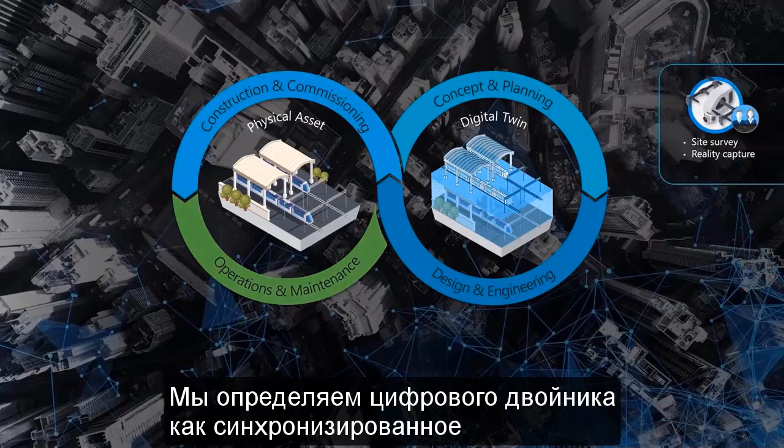Let's start today's journey by understanding what we mean by a digital twin. We define a digital twin as a synchronized virtual representation of a real-world asset, a digital version of reality that is continuously updated. Now, you might be asking yourself, why is this important to me, and what does that really mean? What could I do now that I couldn't do before?

For starters, I want you to think about the Uber app on your phone. It's easy to use, it provides real-time updates, and it gets you where you need to go. It's hassle-free, and the interface is easy to learn. The need to get from A to B never actually changed. What changed was the entire transactional experience.

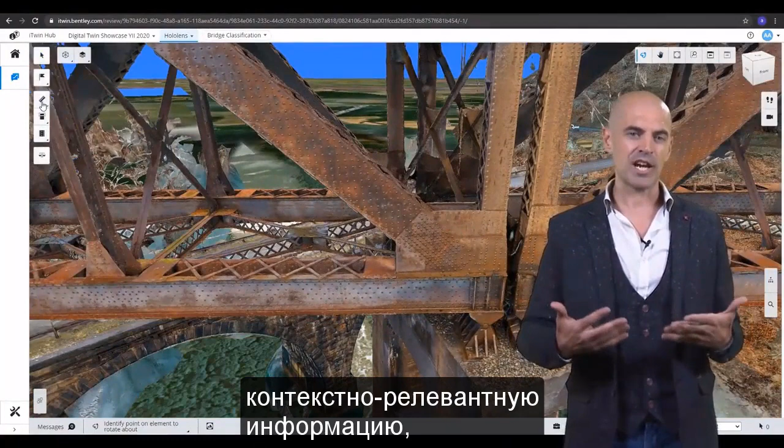And when it comes to digital twins, we're taking a similar approach. We believe that interacting with digital versions of real infrastructure should be easy, it should be intuitive, and it should deliver contextually relevant information when and where our users need it. Now, how our users transact with their asset information, that is what's shifting.

We are seeing owners, designers, contractors, and users throughout the supply chain embracing this new way of working. And what we're talking about here is a true digital evolution in how the physical environment and its real-world infrastructure, including all the equipment, materials, labor, sensor data, and related information is managed throughout its life cycle.

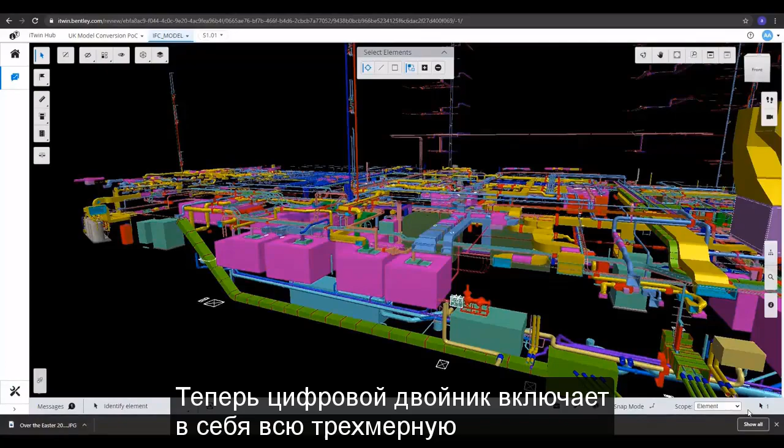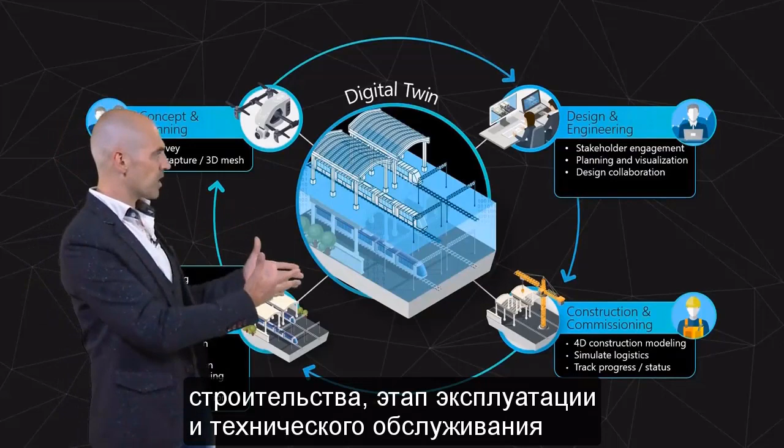Now, a digital twin includes all the 3D geometry, the design information, the issues, the photos, the point clouds, basically the full history of the asset as it changes over time. And this includes the prototyping phase, the construction phase, the operations and maintenance phase, and any subsequent redesign.

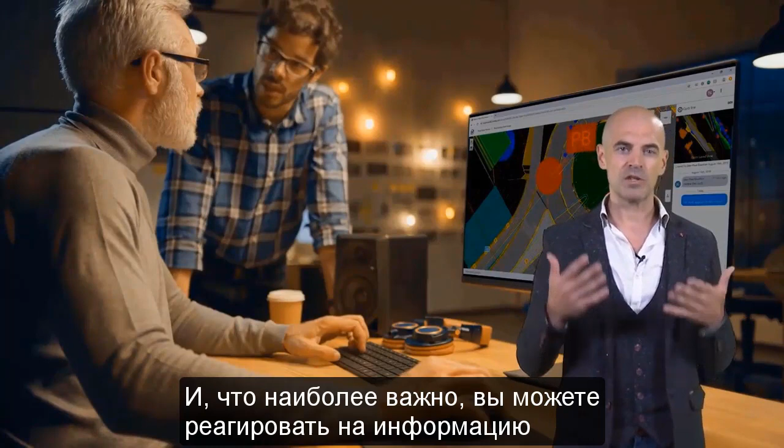So what does this mean for you? It means that you can now access, update, and most importantly, you can respond to information about your asset using an intuitive user interface designed for web, mobile, and now mixed reality.

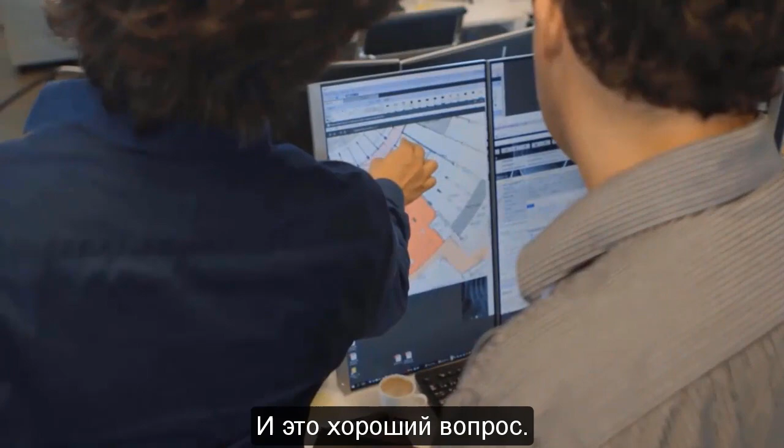You might also be wondering, how is a digital twin different from BIM, Building Information Modeling? And that's a good question. The way we see it, the digital twin is a non-disruptive evolution of BIM-centric workflows. It's a shift from static models to dynamic models, from files to change ledgers, from desktop apps to web apps, and from 2D touchscreens to 3D holographic displays.

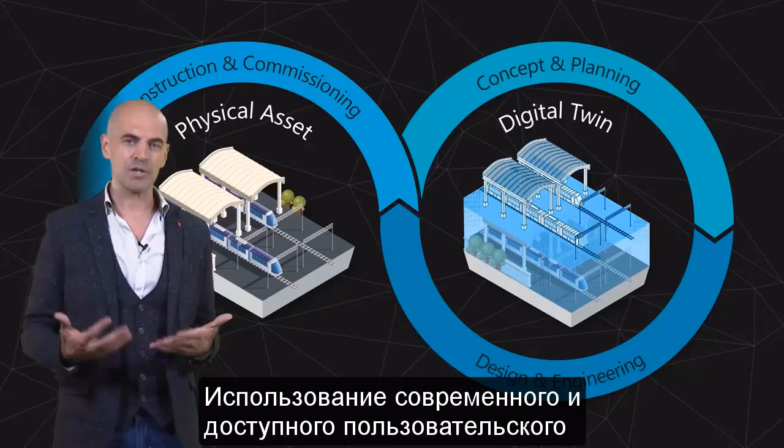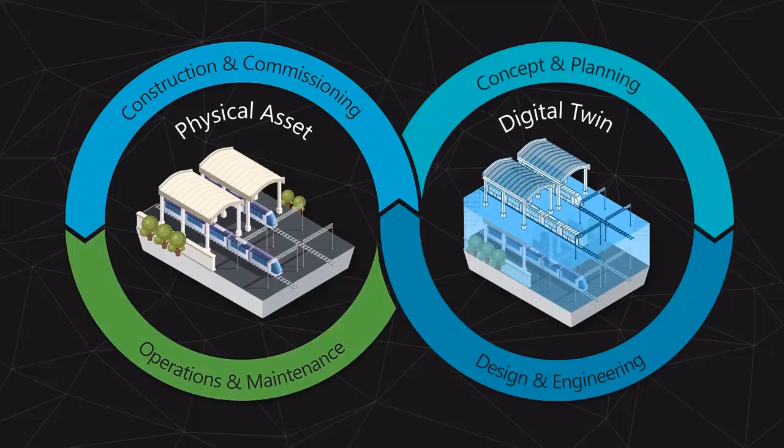Digital twins advance the existing model-based processes by optimizing the feedback loops between team members, using modern and accessible user experiences backed up by cloud services. And with the digital twin, we are seeing the virtual and the physical converging, creating these tighter and tighter feedback loops. And that is what leading organizations are getting out of their digital twins today. Tighter feedback loops leading to better decision-making, leading to improvements in worker productivity, human safety, and asset reliability.

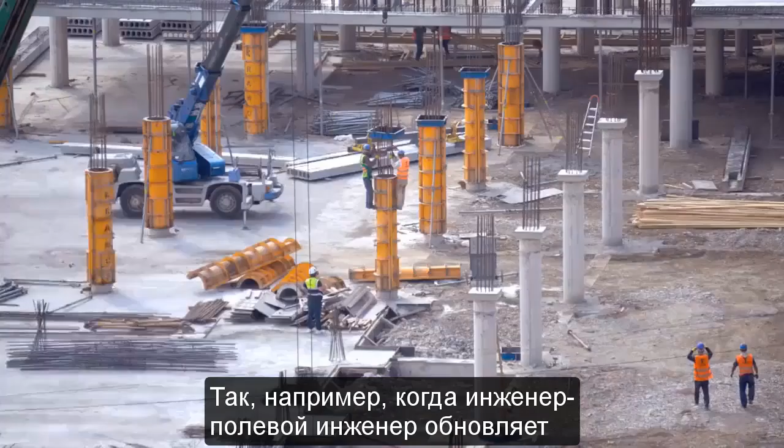So for example, when a field engineer updates the status of a concrete column to being erected in the field, that information is reflected in the construction digital twin, and the production schedule gets updated. Likewise, when a sensor on a pump at a substation detects a problem, that information could be conveyed to an engineer wearing a head-mounted holographic display.

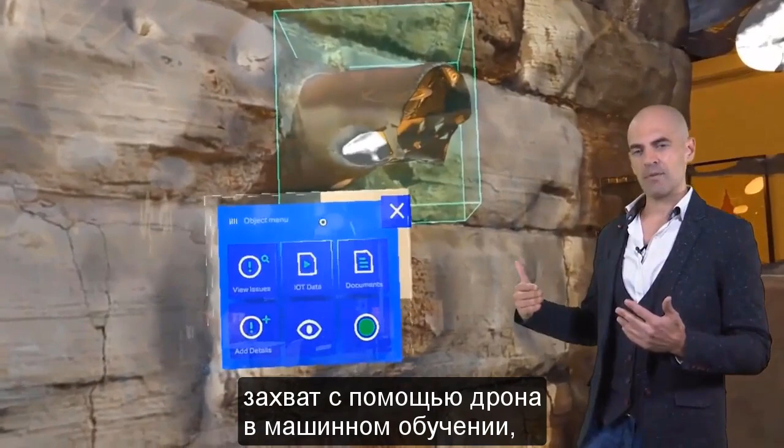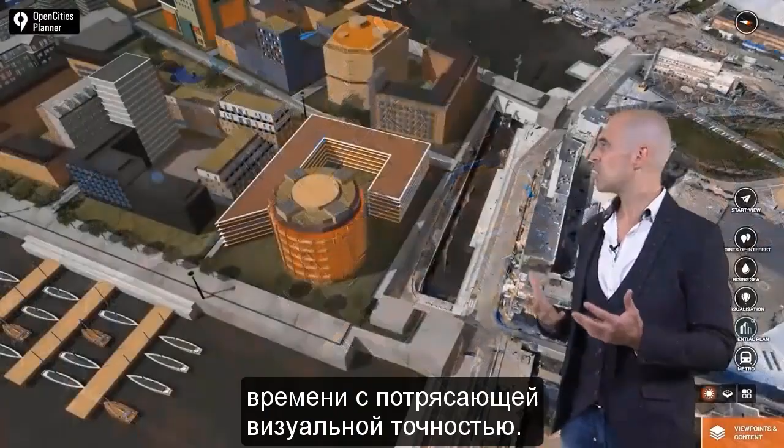And for a bridge inspector, they can now use a drone capture and machine learning to automatically visualize defects on the bridge and visualize that in an immersive 3D experience, allowing that bridge inspection to be conducted from nearly anywhere. And for the general public, for citizens and residents of cities, the infrastructure that supports those cities can be visualized and updated in near real time with amazing visual fidelity.

Now, to talk about the impact of digital twins at city-scale infrastructure, let me introduce you to Sanj. Hi Sanj, it's so nice to talk with you today.

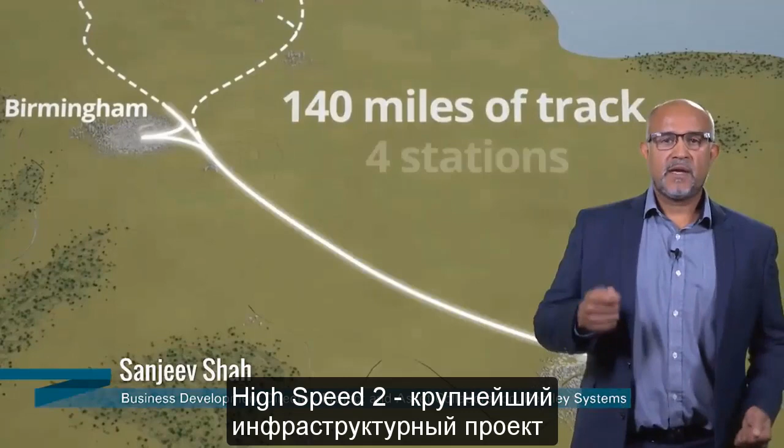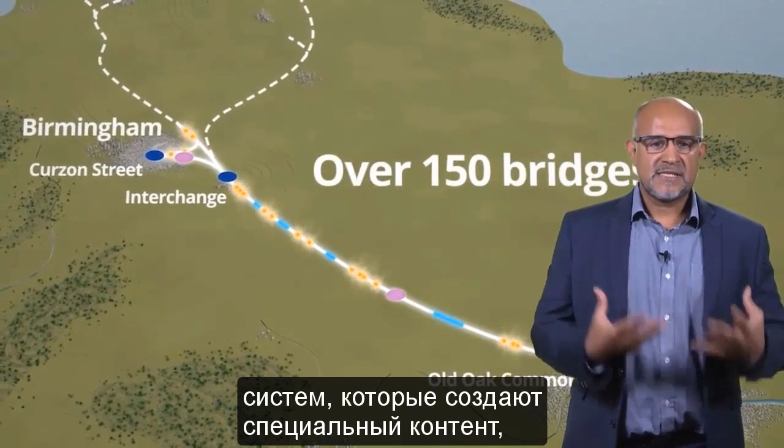Of course, Greg. Well, let's have a look. High Speed 2 is Europe's largest infrastructure project. But even still, they shared the same problems that many of you will be facing today. They use many specialist systems which create specialist content which is stored in specialist systems.

So, for a user to get to all of that information, they'd have to be proficient in each of those systems, they'd need licenses for each of those systems, and that can be expensive. It can be prone to duplication errors. It will create waste. It will lead to litigation and issues, and we don't want that to happen to you.

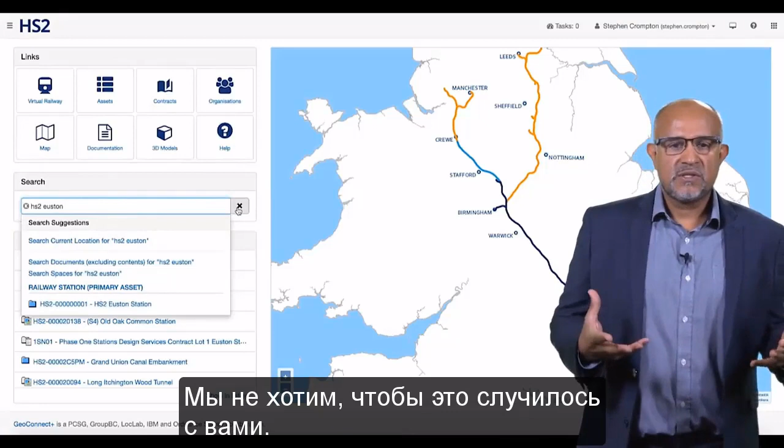What we're seeing, however, and what our users are telling us, is that by far the easiest way to get to content is through a geographical user interface. So here we can see through a quick zoom and a single click, we get instant access to a whole

myriad of information. And it doesn't matter if that information in the top left portlet has come from High Speed 2's asset information database, or whether the information we're seeing from models and from the documents has come from AssetWise and soon to be ProjectWise. The maps we're seeing is a direct federation from Esri ArcGIS.

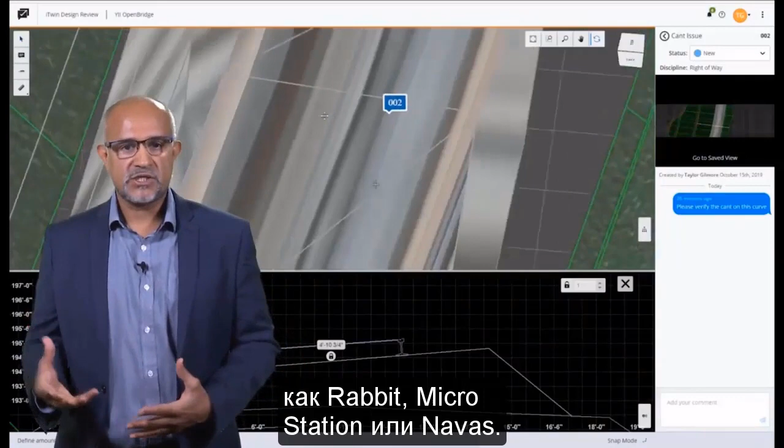But what if you wanted to get into models and see things at detail? Yes, you can just click on the models and they will open up, whether that's in a browser, a mobile phone or a tablet. And it doesn't matter if those models were created in specialist systems such as Revit or MicroStation or Navisworks, you'll still be able to view the whole lot.

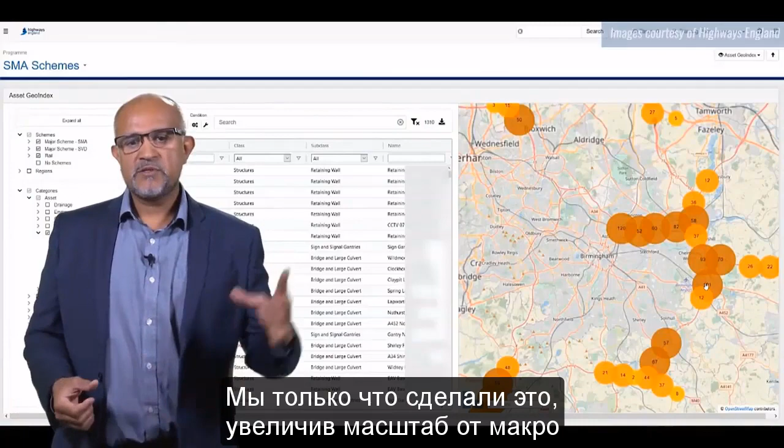Well, here in Highways England Smart Motorways Digital Twin, we've just done just that. We've zoomed in from macro to micro. In this case, a design engineer has isolated a traffic monitor camera. It could have been a bridge, and they could have looked at the details of what the construction methodology was.

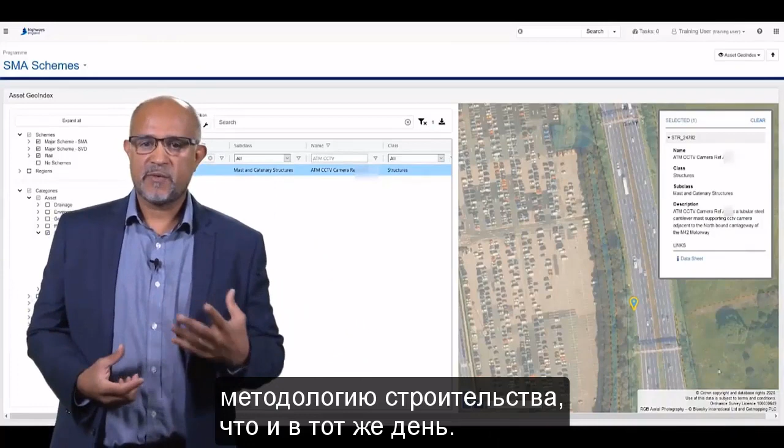They could have looked at the date that bridge was constructed, and they might have wanted to then zoom out and see all other bridges that were using the same construction methodology, installed at the same date, and that's exactly what we've done here. So on the right hand side, we zoom out, we can see lots of these cameras

appear, a bit like TripAdvisor. What you see in your screen is what it's going to list on the left hand side. So that is now going from micro to macro. So yes, we can do this at scale, as we've just seen.

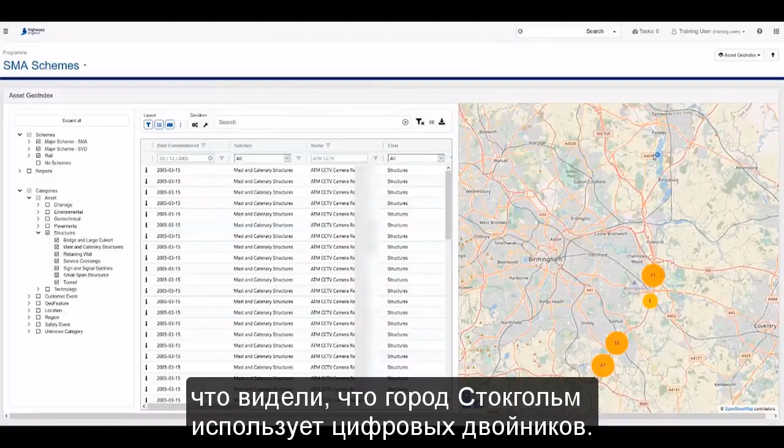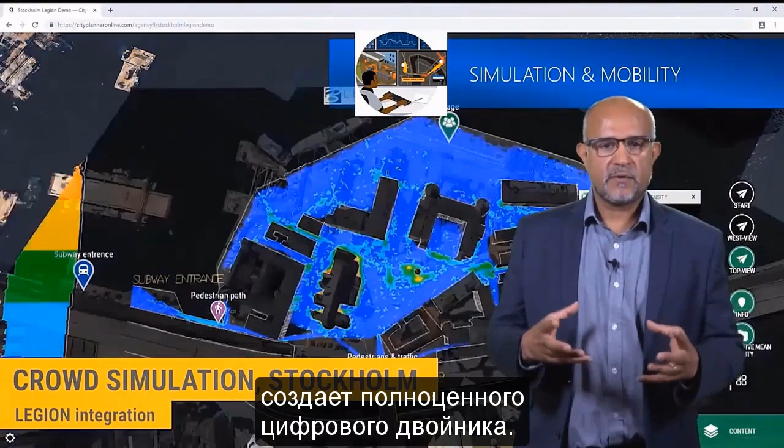The city of Stockholm are using digital twins. They're using digital twins to provide a better experience for their citizens. So by bringing in flood data, information about the population, crime information, all sorts of external information combined to the spatial geometry, the data, the documentation, that is building a full digital twin. But that data need not just be from sensors, for example.

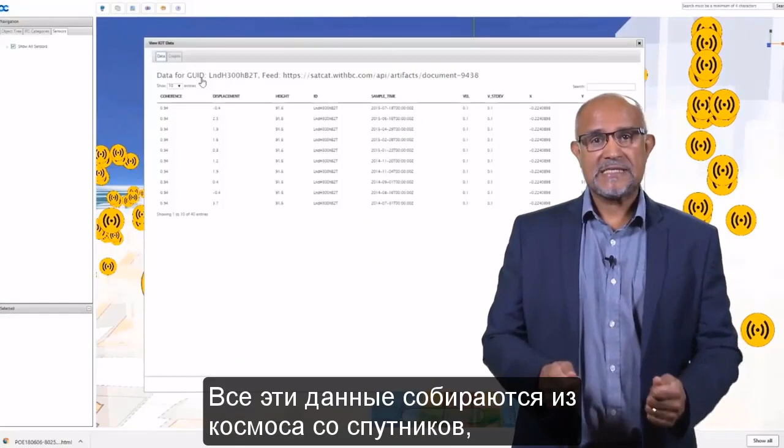If we look at this example here, we can see a project in West London, and would you be amazed if I said these yellow circles are actually representing physical movements in infrastructure up to 1 millimetre? And would you be amazed if I said we've got no sensors installed here? All of that data is being captured from space, from satellites.

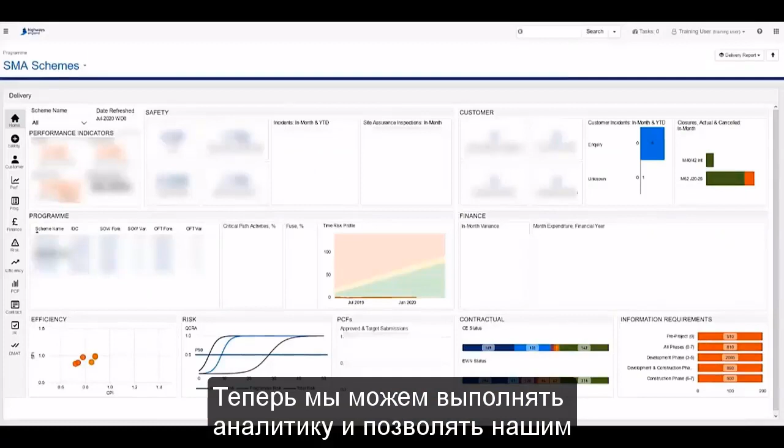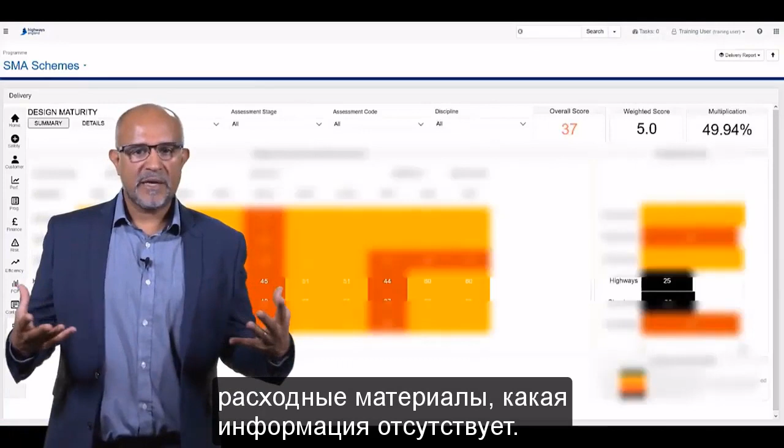So we can actually see the performance of infrastructure in places where we didn't even know we needed to monitor that. And what's even better is all of this data is being captured continuously. So we can now go and tap into that information whenever we want to, which is fantastic. We're now able to run analytics and allow our users to see how they're doing with their KPIs, how they're performing, how their suppliers are performing, what information is missing, and that's the power of a digital twin.

It's been a pivotal year, and some would even say a transformational year for our entire industry. It's given us the chance to reimagine how we work together, but more importantly, how you, our end users, work together. It's allowed us to see how our technology is making a positive impact in our users' daily lives. With that, let me introduce you to iTwin Design Review.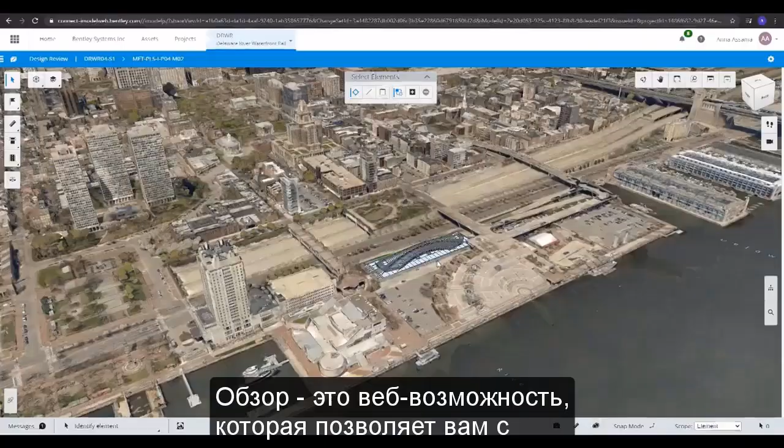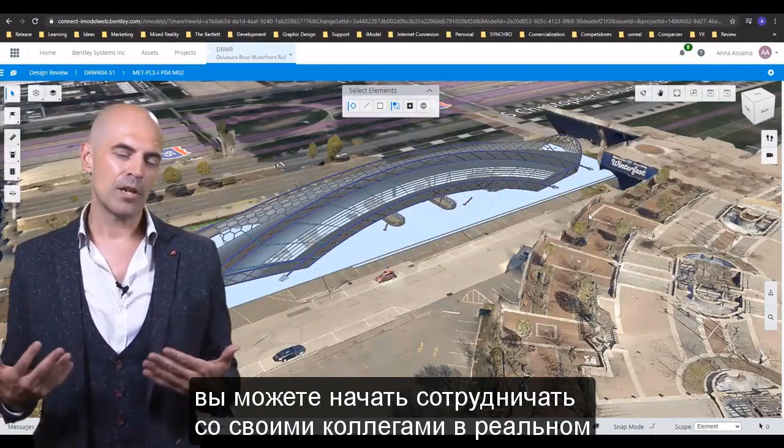Design Review is a web-based capability that enables you to review your design models with ease. And it's totally open when it comes to source file formats. You can import from Navisworks, from Revit, from AVEVA, from SmartPlant, IFC, Tekla, any file format, you name it. And once the models are loaded, you can then begin to collaborate with your peers in real time to view project status, identify issues, and start solving your real-world problems.

Everything is web-based, so as a user, you log in from your web browser, and any information that you add is updated in the digital twin automatically. The data persists in iTwin, making collaboration simple. We've added real-time chat, issue resolution, clash detection, saved views and markups. We've optimized the user experience for communicating about problems that need to be resolved.

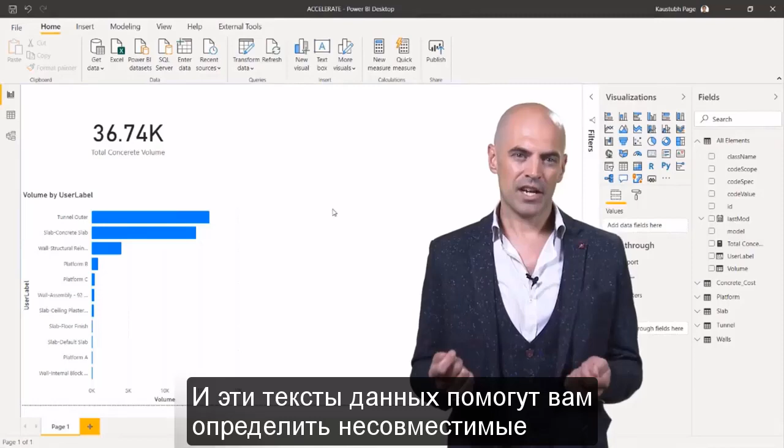In addition to identifying clashes and design issues, you can also perform automatic data quality checks. And these data checks help you identify inconsistent data structures and naming conventions, which will help you keep your project well managed and enables data analytics. And as Peter Drucker states, if you can't measure it, you can't improve it. Having structured data is what feeds iTwin Design Insights.

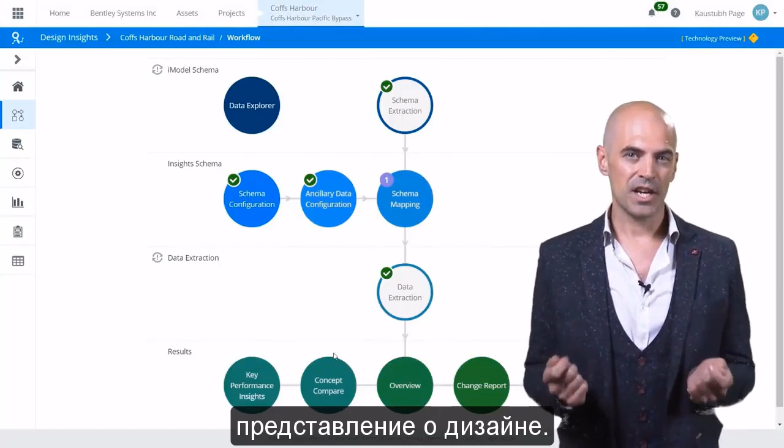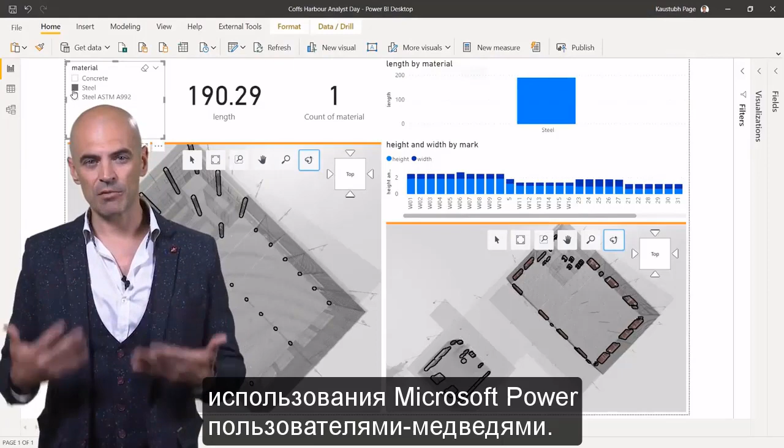It's here where you can identify your key performance indicators such as costs, schedule, material, risk factors, and carbon footprint. When design is updated, changes can be visualized from a comparison dashboard. Here you can see trend lines and make informed decisions based on the data. In addition to these out-of-the-box reports, we've seen increased use of Microsoft Power BI by our users. And in response to that, we've created data connectors so the digital twin data can flow to Power BI and integrate with enterprise BI reports.

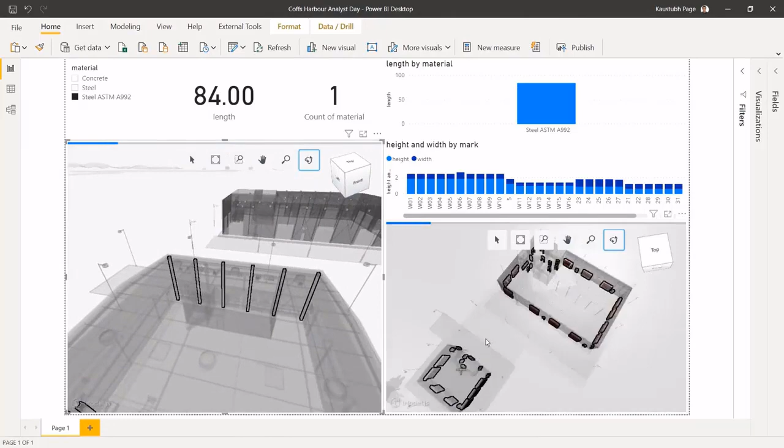We're also excited to announce that iTwin Design Review is now fully integrated with Microsoft Teams. And the use of Teams has accelerated dramatically in the last few months. And this integration brings iTwin functionality directly into the Teams user experience. So now, with a few clicks, you can add an iTwins tab, making it easier than ever to access digital twin models. This opens up digital twins to the non-technical users beyond engineering, helping them correlate and make sense of the complex data through an interactive visual medium. We've seen the power of iTwin, a web service that enables teams to optimize their collaboration.

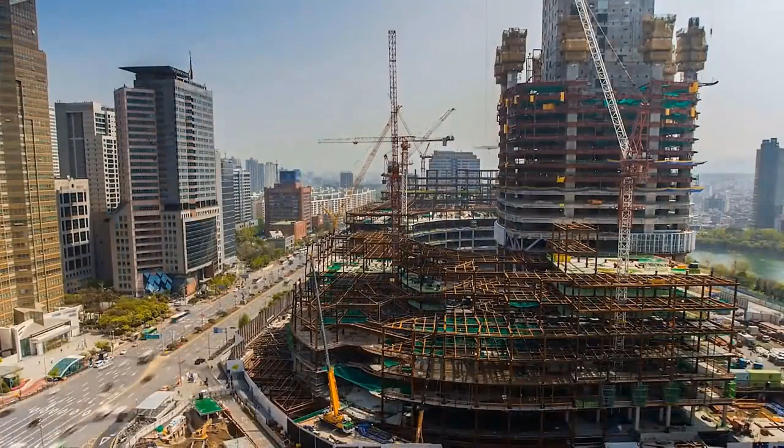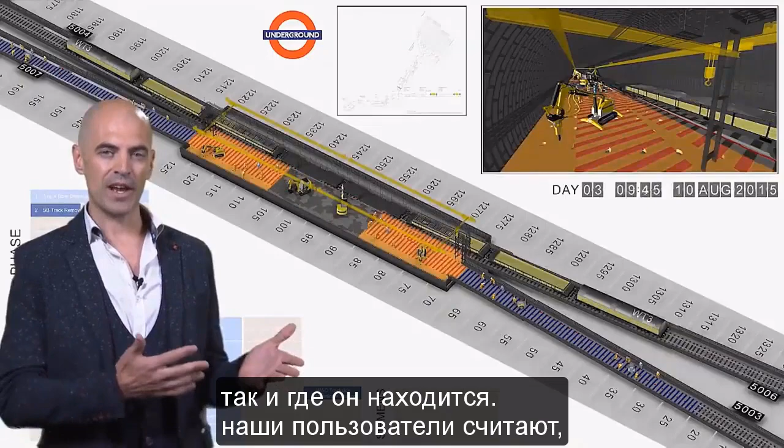So now let's look at how our users are using the same technology to bring their designs to life during the construction phase. To do this effectively, our users love to communicate a great story, a story that explains how the design is going to be built over time, a story that clearly explains all the materials, labor, equipment that are needed to construct a project, both when and where. And our users believe that a great project is not only one delivered on time and on budget, but one that is delivered safely and with minimum risk to their workforce.

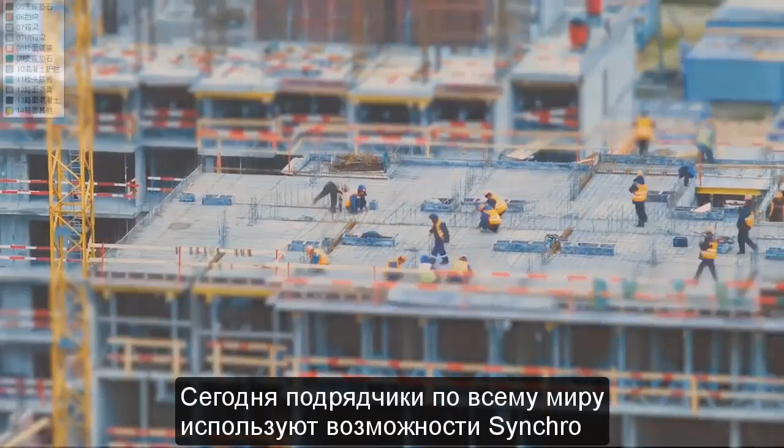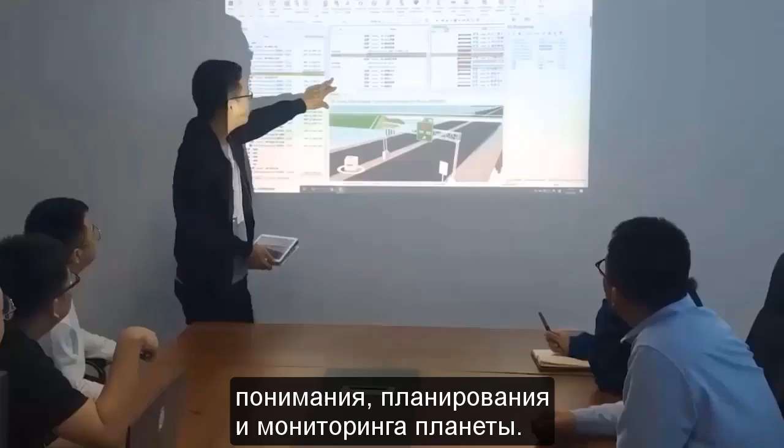Today, contractors all over the world are harnessing the power of Synchro 4D to deliver projects on time and budget. Now, with Synchro, design models are rendered according to the construction schedule, creating an intuitive visual medium for understanding, planning, and monitoring a construction project. And Synchro is now iTwin enabled. It provides the same ability to track issues and monitor change as we saw with iTwin Design Review. Users can collaborate from anywhere, including from the field.

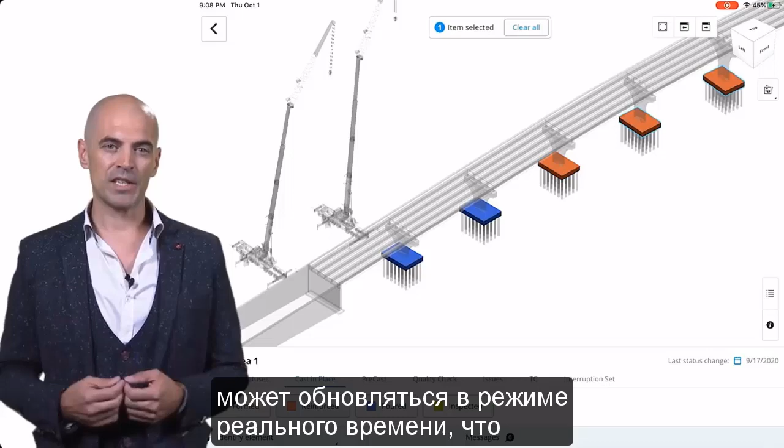With a construction digital twin, information can be updated in real time, allowing teams to not only plan construction, but also track the construction progress. The information available in the web is also available from a mobile device, allowing users to update status, log observations, and create daily logs. The information from the field is synchronized with the construction digital twin.

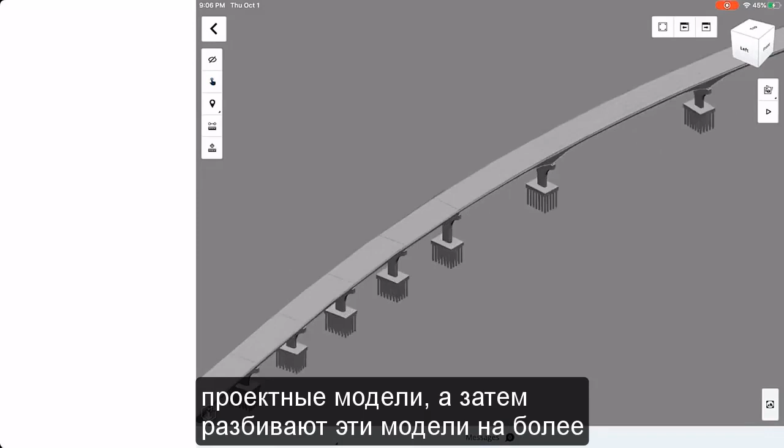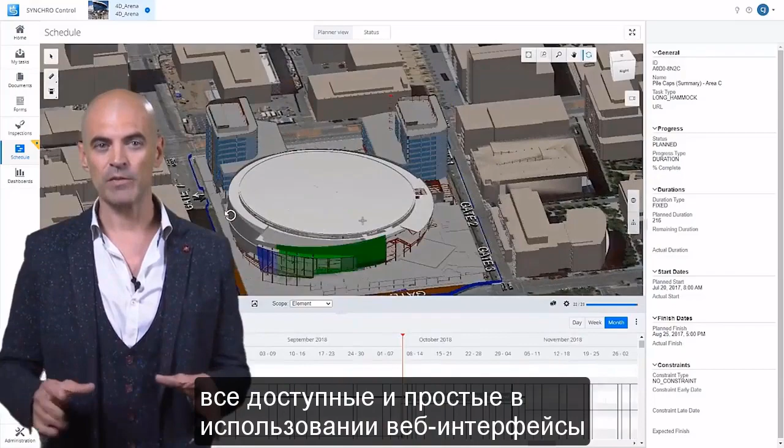To plan a project, our users import design models and then break those models down into smaller sections based on how they want to approach the work. Splitting a design model automatically calculates quantities, making it possible to calculate durations and plan your daily work. The result are detailed visualizations backed up by real schedules and real quantities, all visible and all available via an easy-to-use web interface or as high-quality animated graphics.

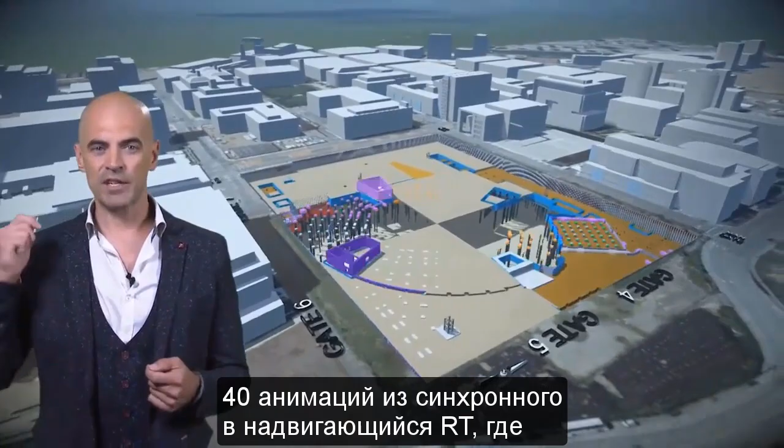And now on this front, we're super excited to announce the development of a new graphics pipeline that will take 4D animations from Synchro into LumenRT, where the users can augment their renderings with people, cars, plants, realistic environments, and high-quality materials. And not only that, but the experience takes advantage of real-time rendering. There's no longer a need to wait hours or days to process a rendering, and the quality is absolutely stunning.

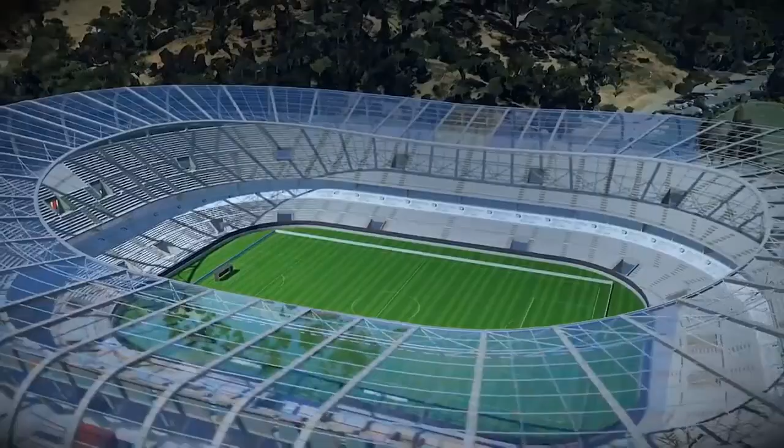What if you don't have an engineering model or a construction digital twin? How do you create a digital twin from an existing asset? Now, for this, let's take a look at a bridge inspection as an example. Now, today a bridge inspection requires expensive equipment. It involves high safety risks. It takes significant time and carries a high cost. In most cases, there is no digital history of that bridge.

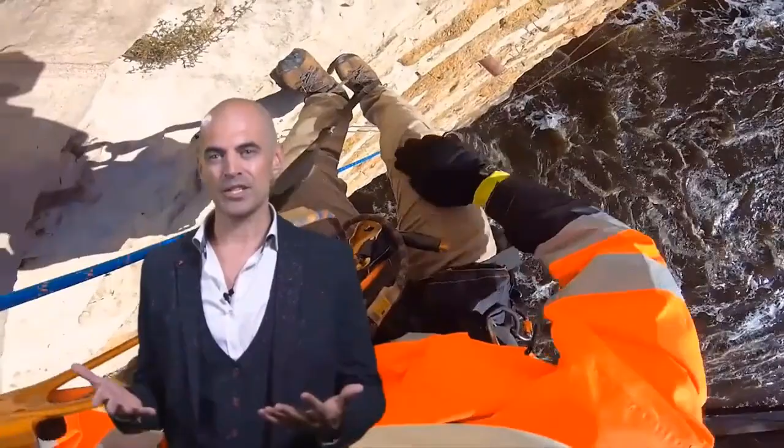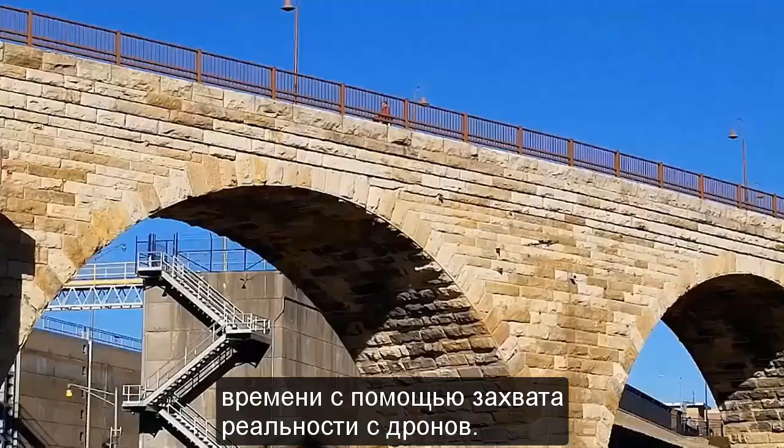Some of our most advanced users are reimagining inspections through the lens of digital twins. In Minnesota, the engineering firm of Collins is leading an effort to fundamentally change how infrastructure is maintained and managed over time. With their reality drone capture, it's now possible for them to experience the virtual bridge in full detail, as if they were at the actual bridge.

The difference, of course, is that they don't need to go hire a machine, they don't need to put on a safety harness or take a car to get there. And they don't need to close the bridge down to perform the inspection. They're looking to do the whole inspection remotely from anywhere. Here, take a look at the amazing level of detail you can see experienced through mixed reality.

Now, once the user's in mixed reality, they can observe an issue or defect and mark it up with natural hand gestures. They can take a measurement, and the inspection can then be synchronized back with the digital twin, where the results are visible in the web browser. The full history of issues now time-stamped and logged for future users.

So just imagine being able to create digital baselines of all your critical infrastructure, all the bridges, the roads, the buildings, and be able to continuously update, monitor, and respond to conditions as they are recorded from anywhere. And that's not all. Using machine learning, we can now identify common defects automatically. Here, you can see cracks being identified and colored. These can be validated and checked from the browser, your phone, or even the HoloLens.

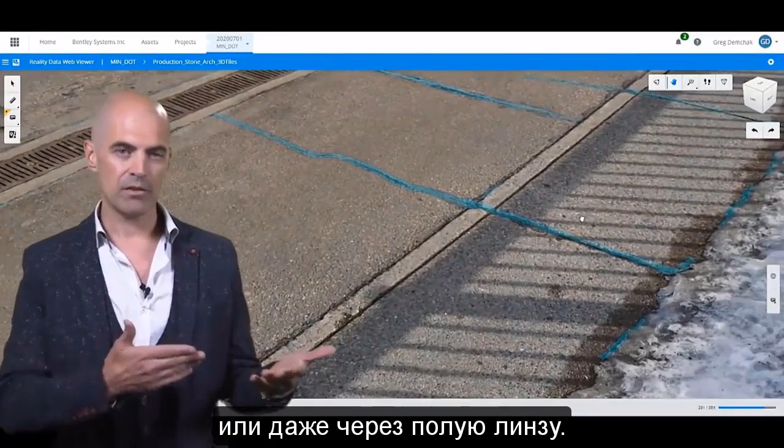And for Collins engineers, everything persists in their digital twin. The history of the asset, its changing conditions being captured and updated digitally over time. Now we're going to shift focus to operating assets and talk about how users from leading organizations in the plant industry are benefiting from digital twins.

And for that, I'd like to introduce you to Mehreen from our PlantSight team. Hi Mehreen, and welcome to the Digital Twin Showcase. Hi Greg, great to be here. I'm looking forward to sharing some of the latest capabilities that our users are excited about.

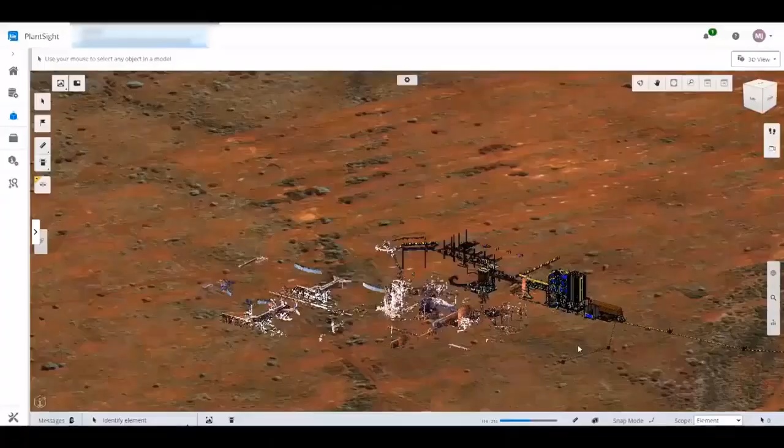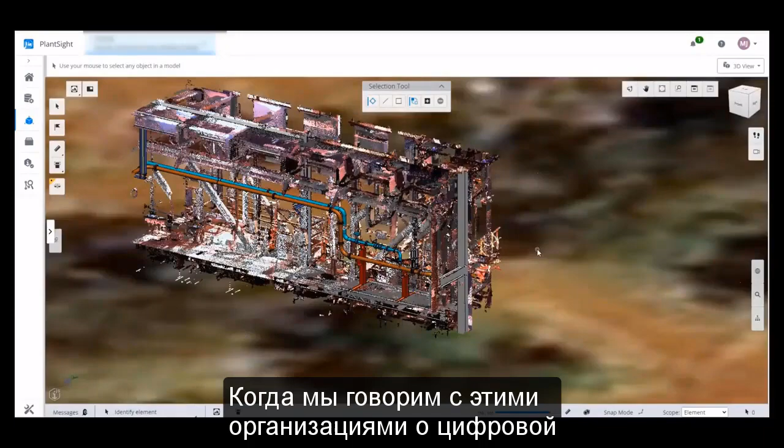Digital transformation is an important strategy for industries and provides them unparalleled opportunities as they navigate dynamic market impacts. The vast majority of revenue, especially for extractive and manufacturing industry, is earned from brownfield assets that have been in operation for more than 20 years, and many for much longer. When we talk to these organizations about their digital maturity, many are struggling to bridge the gap between what was originally designed and the reality of what is actually in the plant.

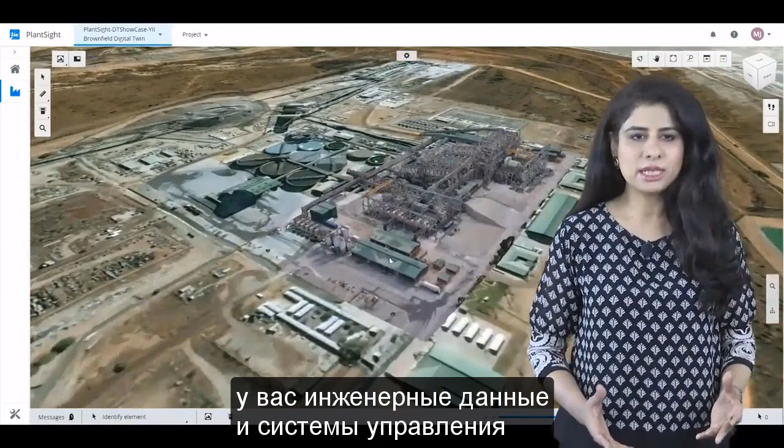Our users, both EPCs and owners, tell us that one of the reasons they selected PlantSight is because they could start their digital transformation journey at any phase of the asset life cycle. Building an actionable and sustainable digital twin of a complex industrial system is easy with the help of PlantSight's cloud-based portal. With PlantSight, you can leverage all of your existing engineering data and asset management systems and aggregate them into a digital twin. Even if you don't have an existing 3D CAD model, you can create an intelligent 3D reality mesh from laser scans and 2D images. Combine the reality mesh with digital engineering models and get a single visual representation of the data.

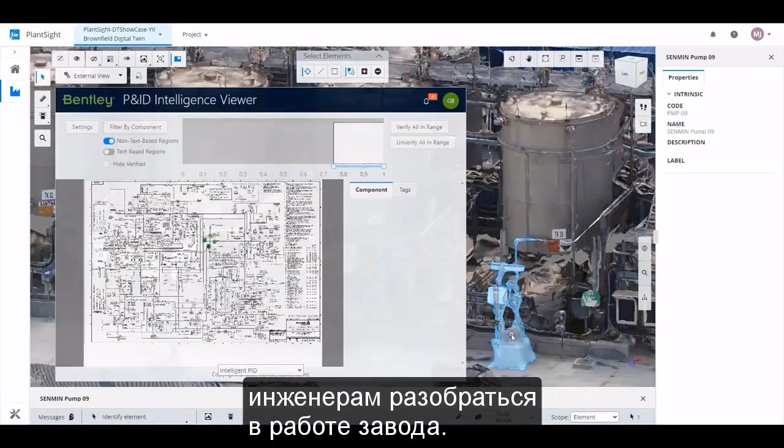A process and instrumentation drawing, P&ID, is an important document. It is a blueprint of every process and power plant and comes in a variety of quality, symbol palettes, and overall complexity. Access to an up-to-date P&ID ensures safety of personnel and assists engineers in understanding the plant's operations. These documents, typically stored in vaults, require workers to physically retrieve them. This is not only time-consuming, but also makes tracking changes difficult and error-prone.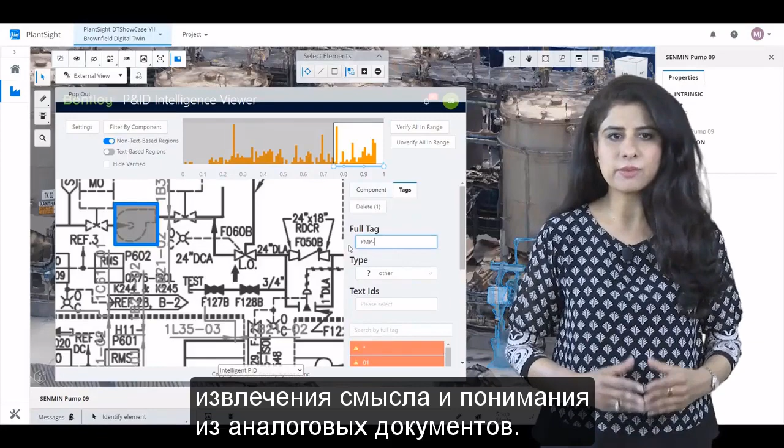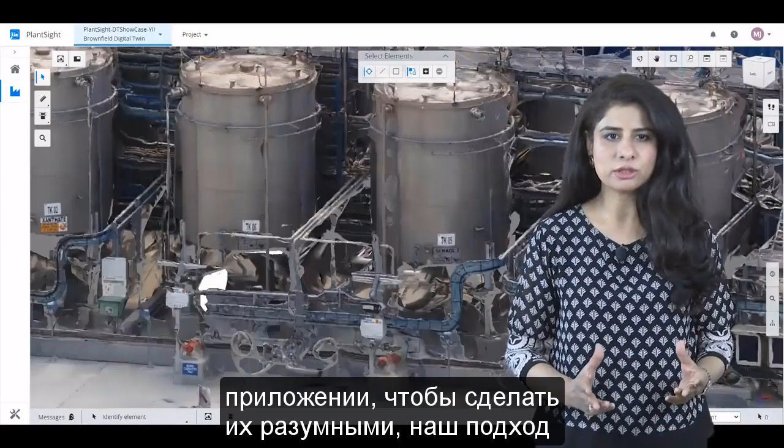To solve this, alongside our reality data solutions, we have developed powerful AI and machine learning tools to extract meaning and understanding from these analog documents. While many companies are currently spending days having humans painstakingly recreate each raw document in a design application to make them intelligent, our approach here completes this task in mere minutes.

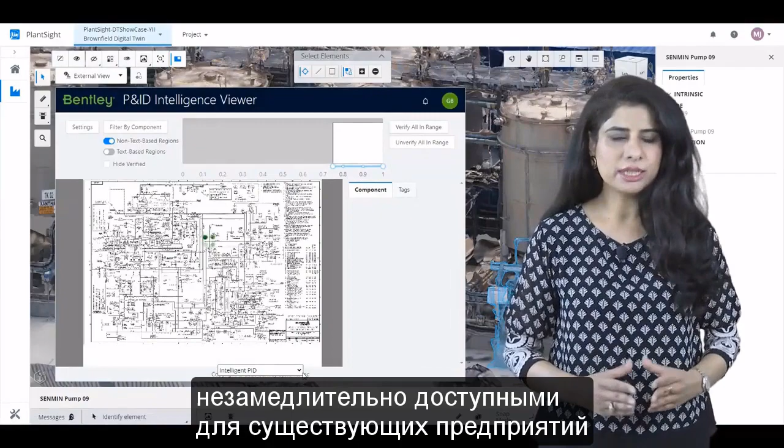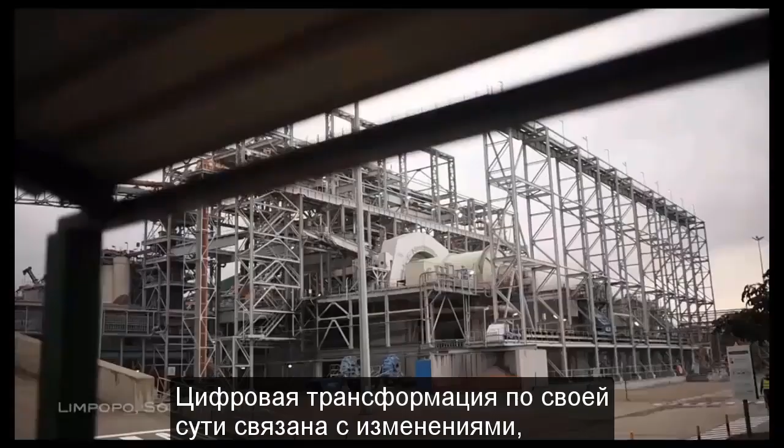This revolutionary patented technology makes the benefits of a digital twin immediately accessible to existing plants and unlocks latent value for our users. By integrating this output with PlantSight and AssetWise, we provide owners and operators a solution to efficiently realize their digital twin, empowering them and their teams to make informed decisions and take corrective action. Digital transformation at its core is about change. An impactful change for operating assets comes from reinventing tradition and reimagining existing workflows. To make this possible, we are working with leading organizations to bring all this information into the immersive HoloLens experience.

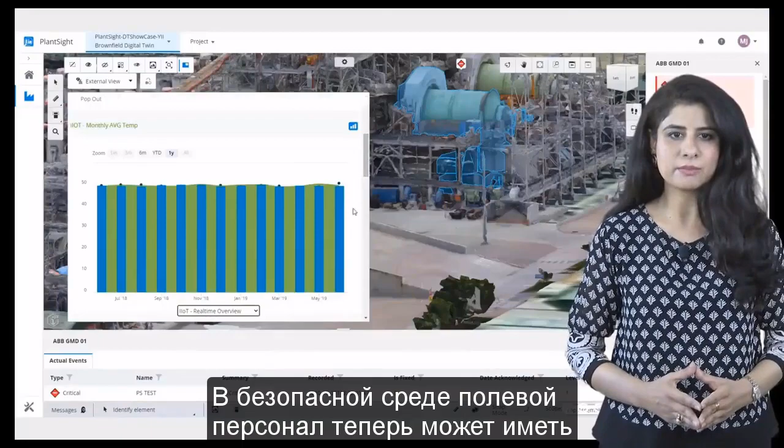Enabling them to conduct trainings, plan shutdowns, and even undertake inspections off-site in a safe environment. Field staff can now have access to experts and context-sensitive knowledge and insights from the twin as they do their maintenance rounds. Here you can see an engineer in the field accessing P&ID documents and IoT sensor data for an asset directly from its digital twin.

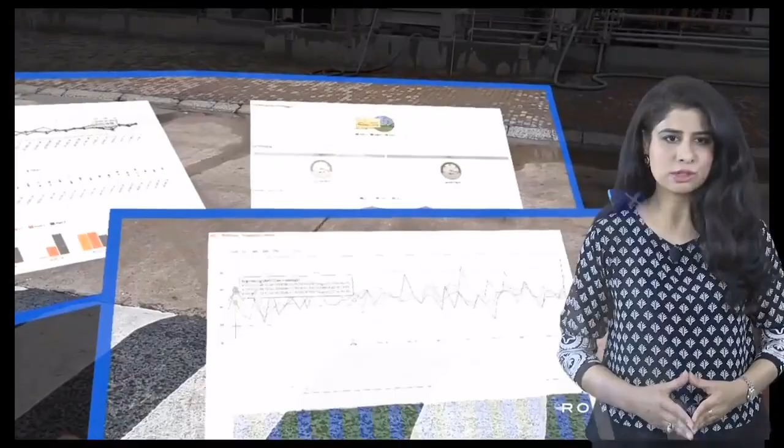Imagine all of the business processes that will combine what is physical and what is virtual beyond location boundaries, working in an immersive digital twin environment that allows you to increase asset performance and reduce risks and operating costs through everyday use of trusted information.

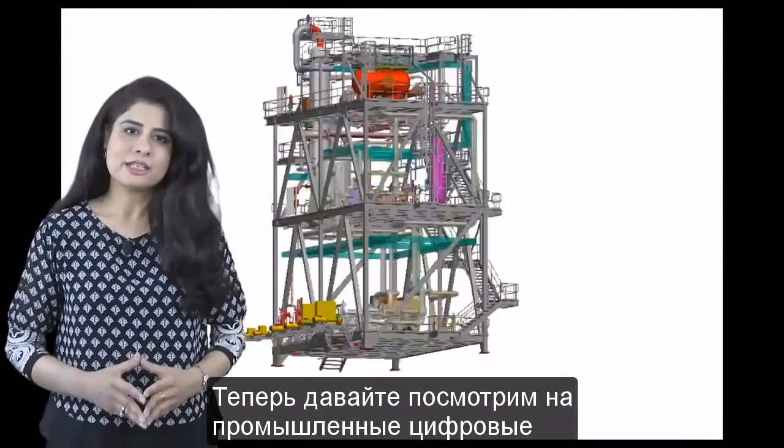Now let's shift gears and take a moment to look at industrial digital twins in the engineering phase. In any project, the cost and risk of an undetected design flaw increases based on where we are in the project's life cycle. Easy and democratized access to up-to-date information is the bedrock of efficient project delivery. Our users, like the one designing this section of a floating production system, are already telling us that PlantSight has improved design collaboration between the traditionally siloed teams.

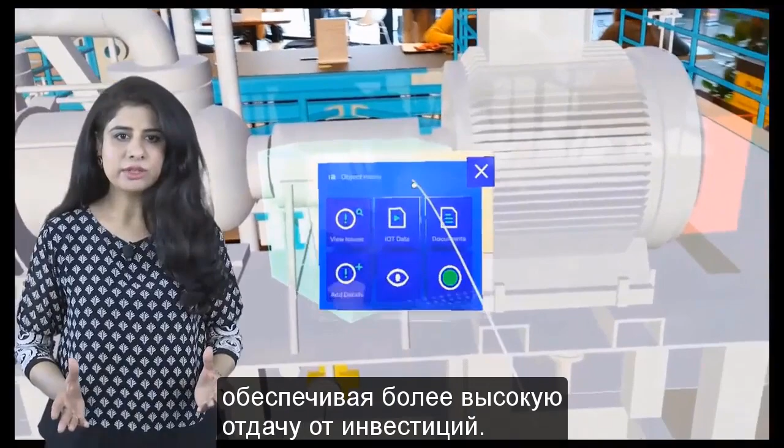Now all of the stakeholders have the same view of the digital twin, leading to faster and higher quality 3D designs. These models are then being used for handover between engineering and operations, shaving weeks of delivery schedules and bringing higher returns on investment. Issues can be identified in real scale with the HoloLens and verified in the browser. The same data is synchronized between both the environments. Users are already reporting that collaboration with this immersive experience is enabling them to understand their design from a human-centered perspective.

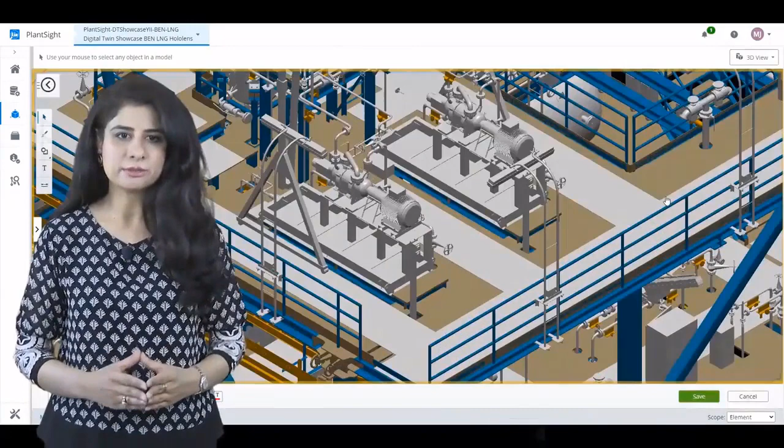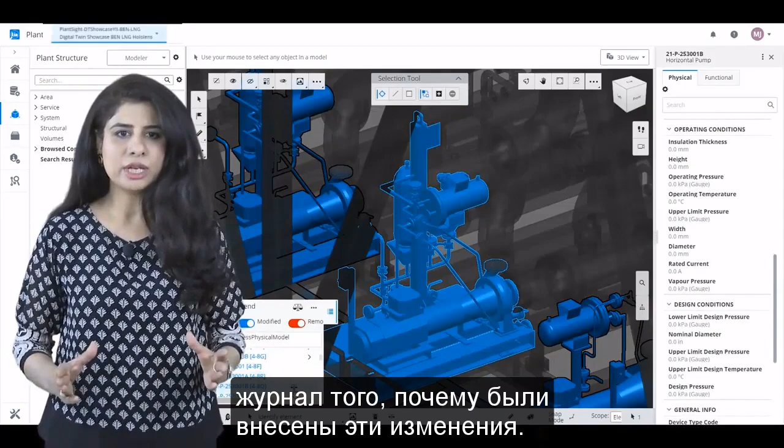With issue management integrated into our desktop, mobile, web, and mixed reality applications, you no longer have to pass files and notes around in emails. All design decisions are electronically captured, ensuring that you not only have a timeline of change for engineering data, but also a complete audit trail of why those changes were made. With our digital twin capabilities, we have taken the suspense out of the design process, ensuring your heart skips a beat only when you see your amazing designs come to life.

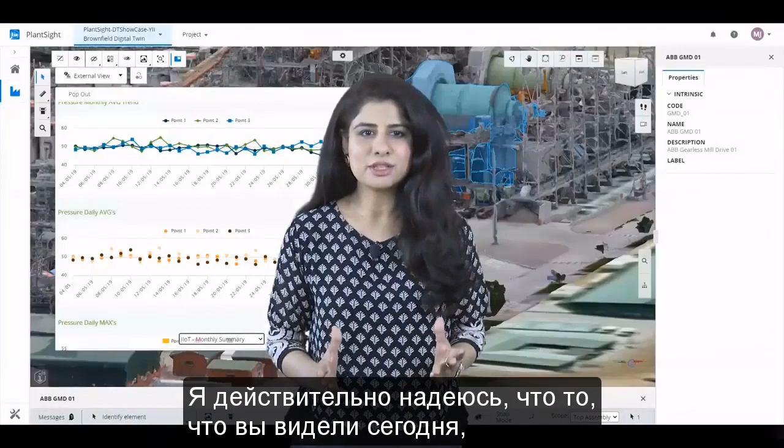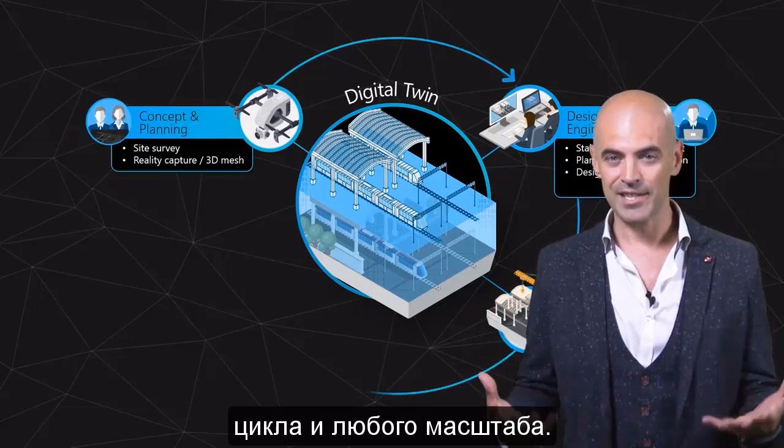I really hope what you've seen today excites you and that you're inspired by the larger picture and are as fascinated as I am with the details of building your digital twin. I want to thank you for taking time out of your day to explore some of the most interesting applications of digital twins and to see for yourself the huge potential this technology has to offer. After all, it's your passion and your vision that drive us to create solutions that enable you to face challenging problems head on. And you can literally start today. You can start from any point in the life cycle and at any scale. And it doesn't require a major rollout or a massive deployment of software to get started.

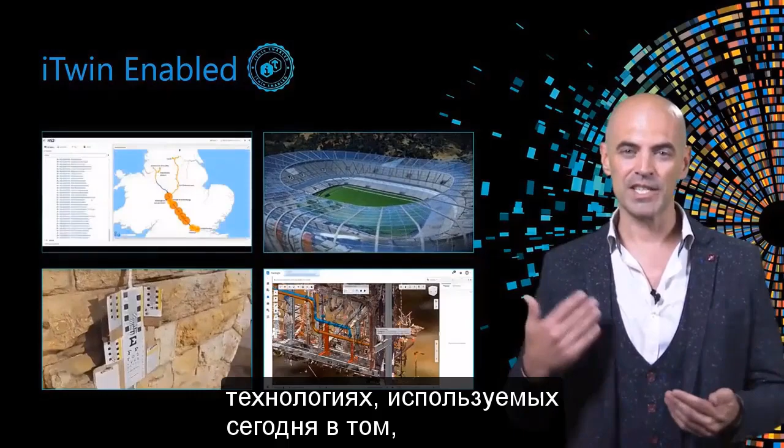I hope this showcase of digital twins in action has given you a glimpse into some of the exciting technology in use today and what you can achieve with a digital twin. Thank you to Greg, Sanjeev, and Mehreen. Such an exciting and inspiring time to be working with digital twins.